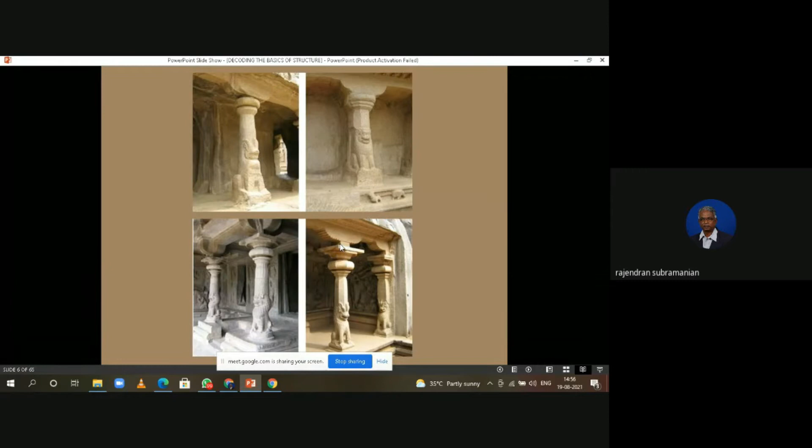Okay. See, this is another column in the front, how they have cut it and scooped out. See the cave-like thing. It goes on like that. And mostly this is not done for residential areas in India, especially in this part of India, that is Tamil Nadu. They have mostly used it for temples and other things. How many of you have visited Tirupparankundram Murugan temple? It is totally a carved temple. From the road it goes inside. So like that we have a few temples carved. And these motifs represent the type of architecture it is.

See, this is Mahabalipuram. Here also, the rock must have been at this top level, full, or here it would have gone like this, curved. And they have marked the plan from the top, and they know what depth it has to go. The depth also they've calculated, and they have started carving from the top. You have to come in reverse. So this is a very tough thing. Some artists, even pencil sketching artists, don't start from the beginning, an eye or a head. They'll start somewhere at a part of the body and then end up with that. So this is pure talent, and they had so many skilled persons.

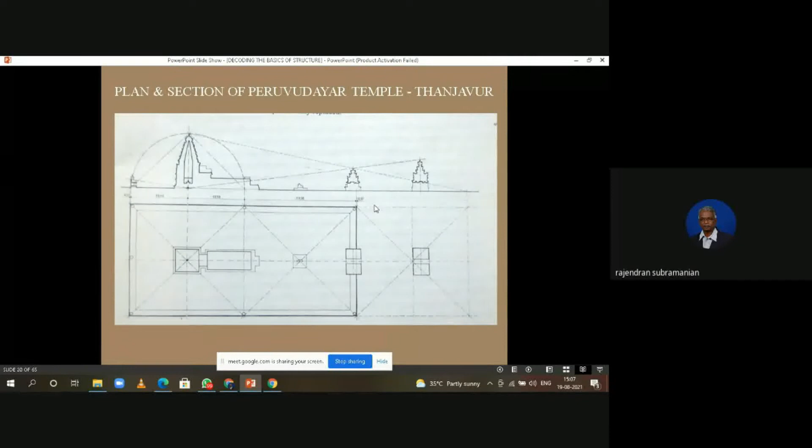See, coming to the subject, as we said, the load. Whenever a structure is resting on the top of the earth, it is pulled towards the core of the earth. That is gravitational pull. And now the structures are very tall. In the 10th century, the 60-meter tall Peruvudayar temple was the second tallest at that time. So we had the credit of constructing the second tallest structure 1,000 years back.

And I just remind you, the total load is transferred fully. And it is transferred in a foundation, something like a raft. The raft is going to be the whole plan of the temple. That is what we call a raft. And the raft is what we do in RCC. Reinforced concrete is used, and the depth will be about 1 meter or 1.5 meter or 2 meter. And this whole thing floats.

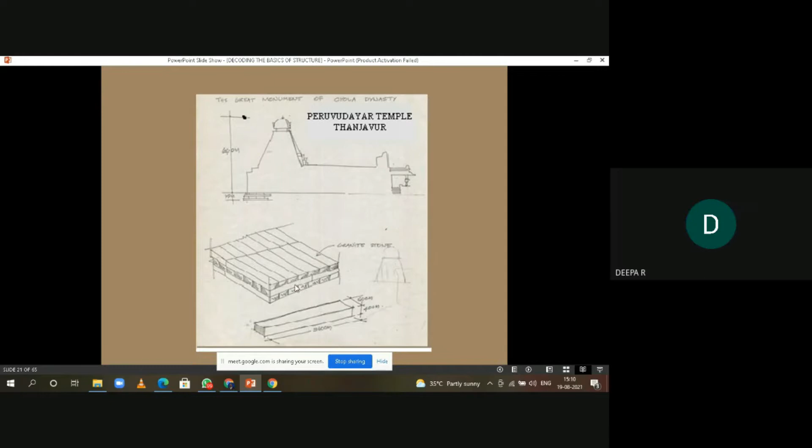Yes, sir. See, this is the foundation, we call it raft. You know, what is a raft? It is equipment used in water to carry heavy weights, so that it floats. A lot of wood logs are tied, and over that you keep the heavy weight. So we call it a raft. Another name for raft is barge. So now the raft. This raft technique was used about 1,000 years back.

The raft's main function is to distribute the load evenly throughout. When a load comes down and is transferred over a wider area, it distributes, and the earth is able to resist the load. That is the concept of it. So in the raft they had used stones, to a length of about 3 meters, 2.4 meters, or 45 by 45 centimeters by 60 centimeters. This type of stones were used. So the foundation's function is to distribute the load. That is why foundations are wide at the bottom.

Another example I can tell you: take a crowbar of 15 kilos, and take a rammer of 15 kilos. The rammer bottom will be about 20 centimeters by 25 centimeters. The crowbar has a very sharp edge. You drop them from an equal height. What happens? The crowbar penetrates more. Why does it penetrate more? The point load. The point takes all the load.

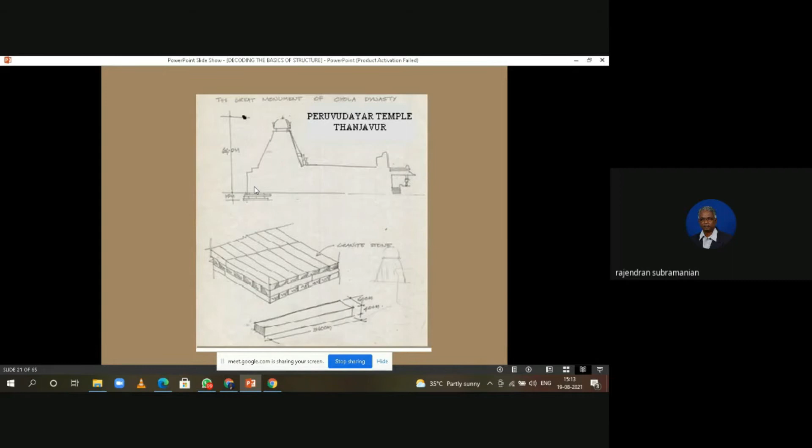Everywhere, in whichever country, they started using a vertical element that supports a horizontal element. The total load is distributed by that horizontal element, and half the load of this horizontal element comes to this column, this post, and half goes to here. So that is how it distributes.

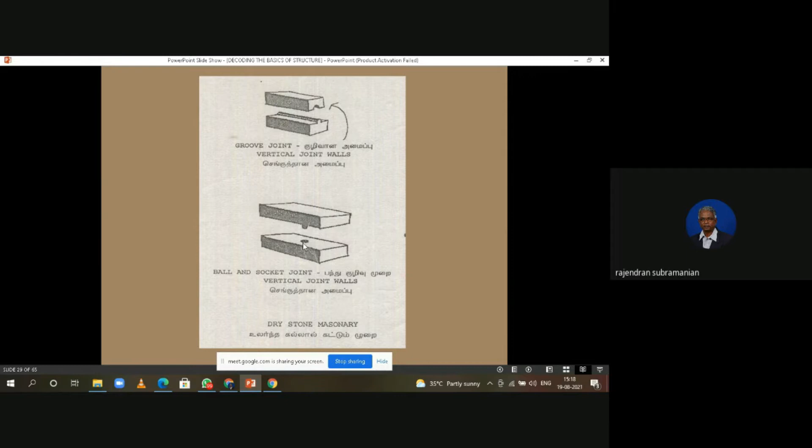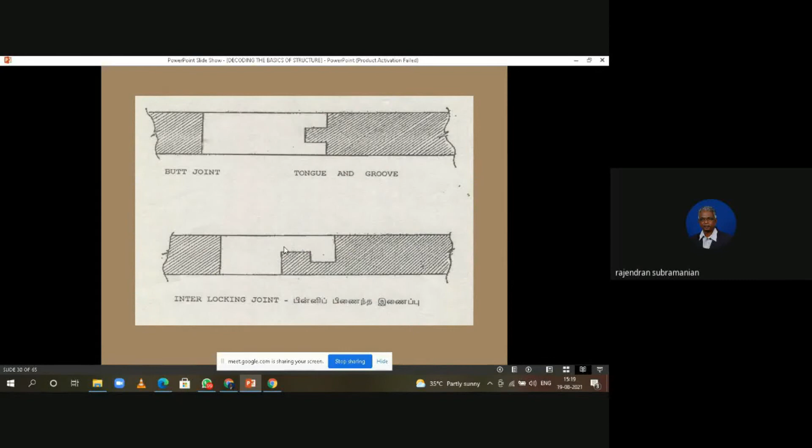See, this is tongue and groove. And ball and socket. This is a ball and this is a socket. This is to reduce the lateral movement. Another tongue and groove, straight line. And this is an interlocking system. All this was done in stone.

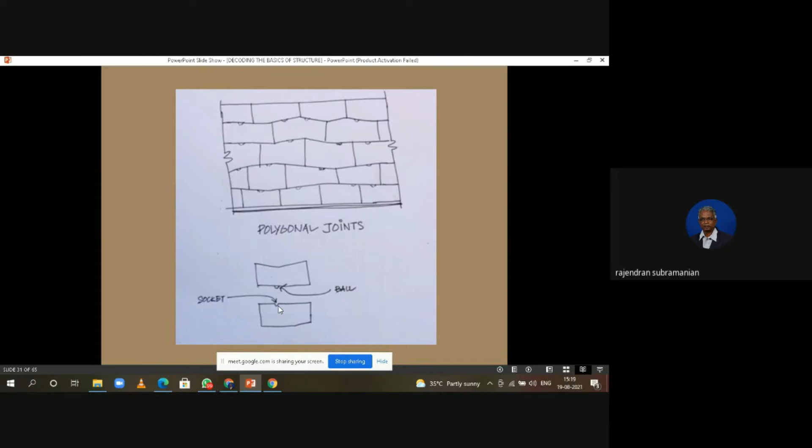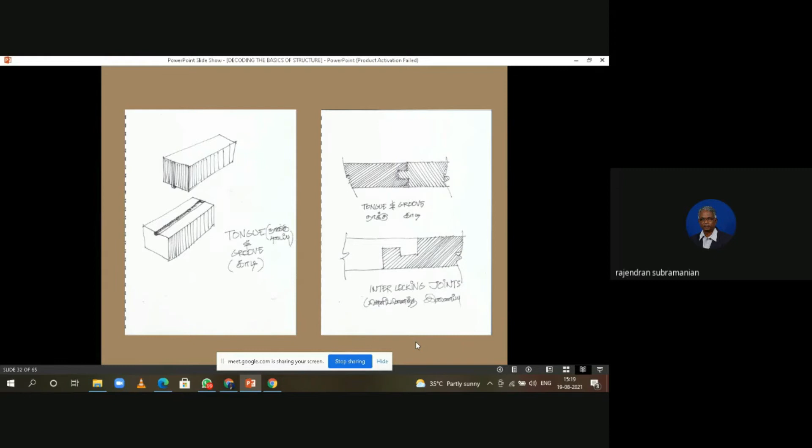See, this is another. You would have seen the big temple wall. The lines are not straight. The joints are not straight. That we call polygonal joint. And there is no mortar. This itself gives lateral resistance. Nothing can dislodge this. This wall, this is a ball and socket. The walls are done like this. Again, tongue and groove, interlocking. See another wall. This is how they've done it.

From here only the Westerners have taken the clue. What is this? Lego blocks. It is nothing but, instead of ball and socket, ring and lock. It will have a cylindrical projection and the top will be hollow, and it will be tightly fixed.

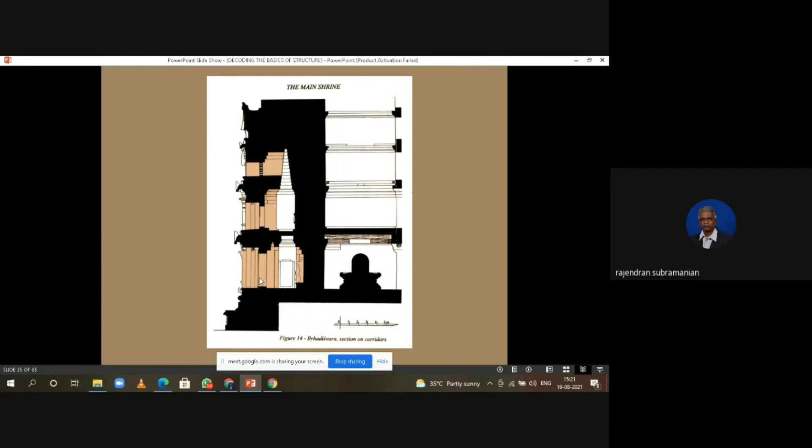See the beautiful cross section of this. And you can see the detailing, the side compound, what I said: one wall is 13 feet and another wall is 11 feet and the inside corridor is 6 feet. See, there are 2 layers, 2 tiers, and over that is a hollow structure. But see, at the top, it goes up to the top, hollowness, just below this.

And see how the load is; it's solid. It's only done something like a corbelling only inside. And the load is transferred on this and brought to the 2 walls. And from the walls, it goes to the ground, raft foundation. The front mandapam, where you could see a lot of pillars, and then the roof.

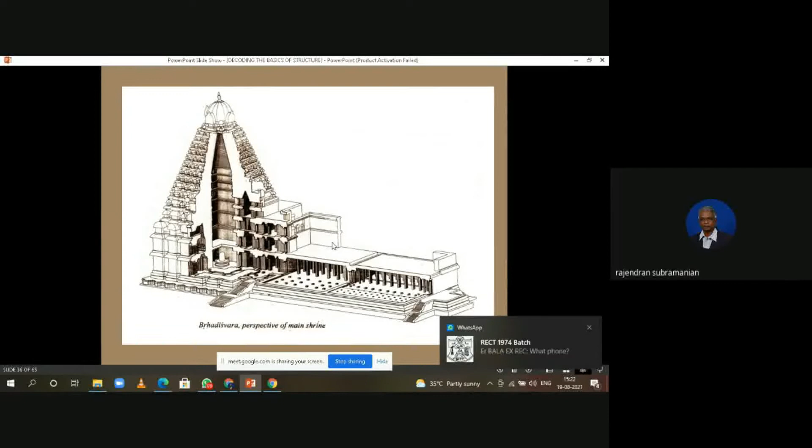See the inside corbelling. It goes up. It goes up. And this is what I said. It's a polygonal joint. It's not a straight line. Randomly it goes.

Look at this. Another technology. Technological wonder. See, from here, from the support, from the column, it will be about 2.1 meters and more. And the whole thing stands. This is not wood. It's all stone, carved something like woodwork. And this is a support. This is a cantilevered support. This is a fulcrum, a beam.

Over this beam, this sunshade is placed. And the way the sunshade is fixed, we'll see the details. See, this is how. Bottom pillar, from there the beam. This beam is anchored to the ground, the other backside column. And over that, there's a beam fulcrum. And on that it rests. And again, this goes up.

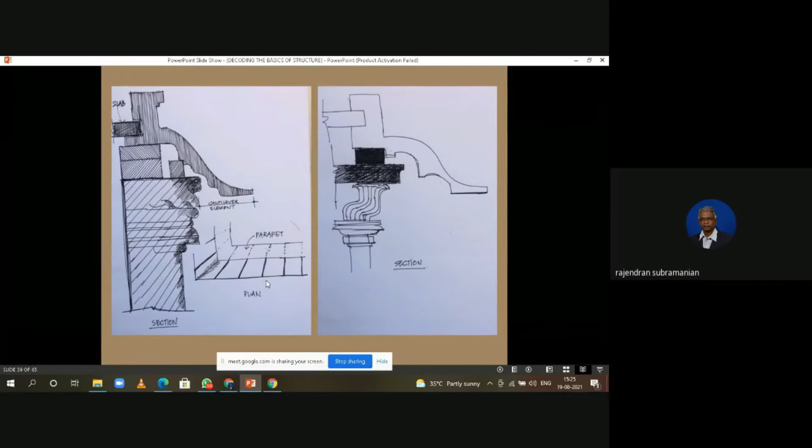The whole thing stands. It was done 1,000 years back without any technical machines or anything. See, they had the mind, they had the wisdom for load distributions and other things. Look at the cornerstone. One is at 45 degrees. This is directly to the east towards north. And this is 45 degrees.

Look at this, how it is. This is one unit. And this is another unit. This is another unit. That is how it is assembled. It is something like woodwork, but it is not woodwork. See the joints, 1,000 years it has been standing without any mortar, like this. See this. This is a separate unit. This is a separate unit. Look at this.

Now coming back. As I said, posts and beams. How many of you have seen this? In Tamil, it is called Sumaidangi. Sumaidangi means a load bearer stone. Sumaidangi kal. See, this will be at the junction of a highway where a village road branches off.

So when they come in a bus or in a vehicle with a head load, they take the head load, place it, take some rest, then take it from here and walk to their village. From the village, when they come to the town, they'll bring the head load, place it and then take it. This is the best example of posts and beams.

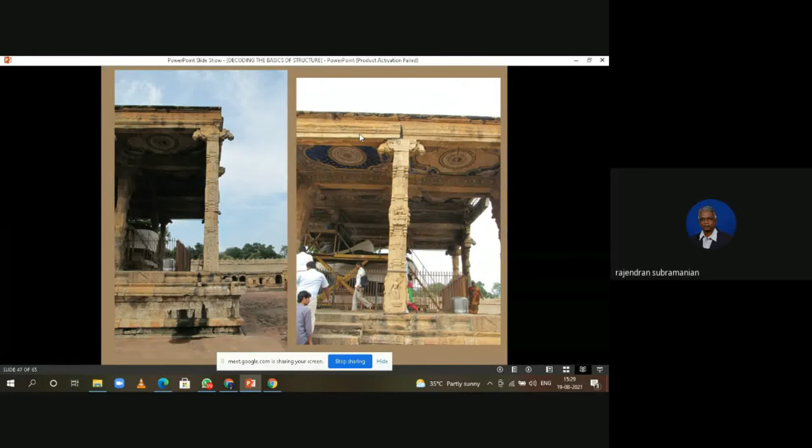See, this is another column. See these decorative motifs to bring the projection like a cantilever. At the same time, they conceal it with the decoration. It is a cantilever. Still further it goes. So that's how they reduce the span and introduce a beam. The same technology we are adopting now.

We are doing a lot of temples with machine-made stones. See, like this. See, this is a bed block at the bottom. Over that, a stone pillar. And over that, another bed block at the top to take the load of the beams. And over the beams, we have either a vaulted roof or a plain granite slab roofing.

This is how the modern temples are done with the traditional methods, the principles our forefathers had adopted. Now we are doing it with the modern materials, with the modern machineries and tools. We are adopting the old system.

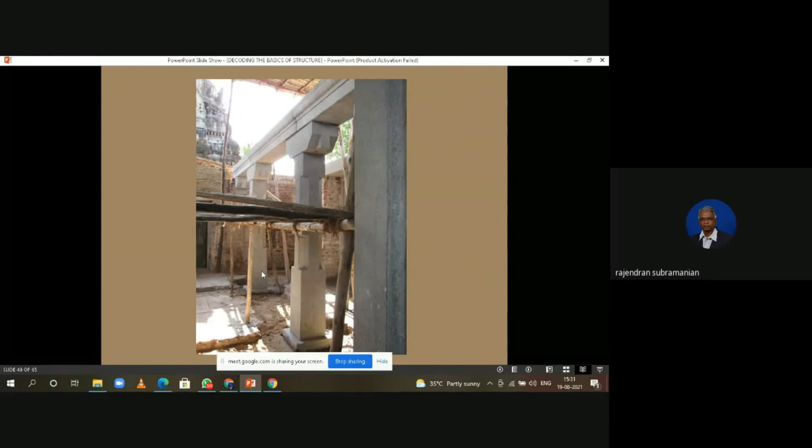The same has been adopted by a European firm by the name Teamage. That is in India. Chennai Silks is doing that Teamage work. Here you can see the columns. See, you can see the column rods in the floor. Up to the ground floor, regular construction is done. And over that, the dowel rods are left. And then the columns are cast at different places with holes, 6 holes on that.

And it is inserted on the rod. And the 3M paste, a chemical, a glue, is epoxy, not acrylic, epoxy. Epoxy glue is inserted, and this stands. And over that they go for a beam. This is something like a stonework done by Rajarajan, but now it is done in a modern way, with modern materials, and they do the work very fast.

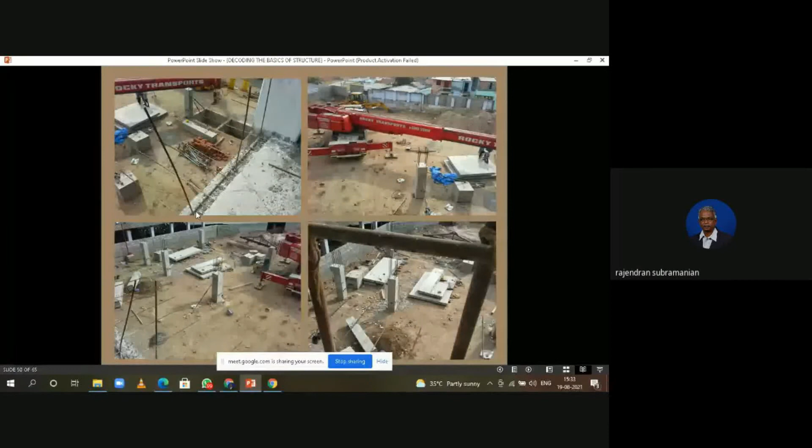The material is cast at different places. They bring the elements by truck and fix them in place. This is using modern technology, doing the traditional work. Very beautifully adopted. So what I say, Rajarajan has done 1,000 years back what we are doing now.

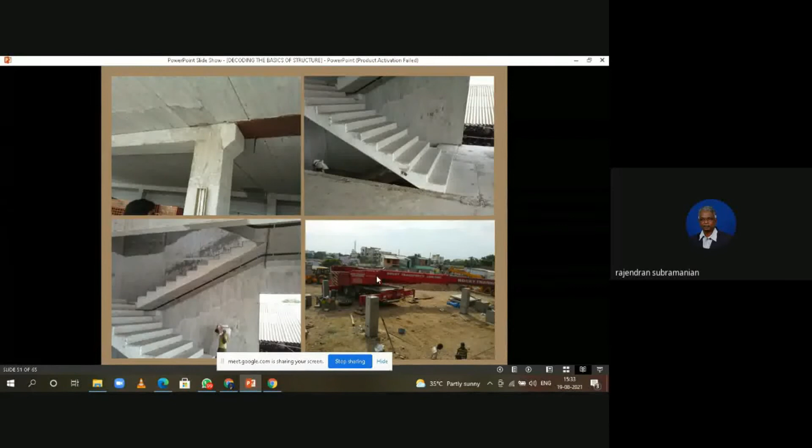Look at this, even the staircase is cast separately. The beams are cast separately. You'll see how the beams are fixed. Staircase. See the column, see the beams, and over that slabs. The precast element. See, I said the dowel rods, over the dowel rods, they place the column and grout it with the epoxy-based glue. Through these holes, under high pressure, they apply the glue, and the column stands upright.

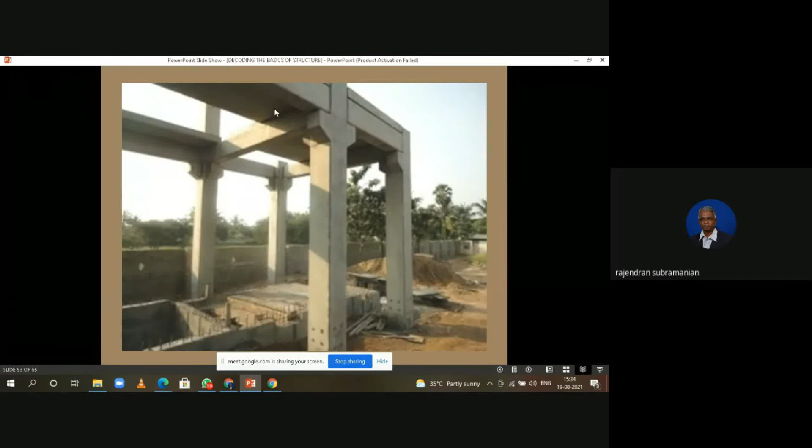And in this, they place this beam. And over the beam, they put the slabs. Look at this. This is a column. This is a beam, independently. See, look at this. The technique we call it precast. But what Rajarajan has done in stone, they are doing it now with the precast technique. It's nothing. Only the material shift is there.

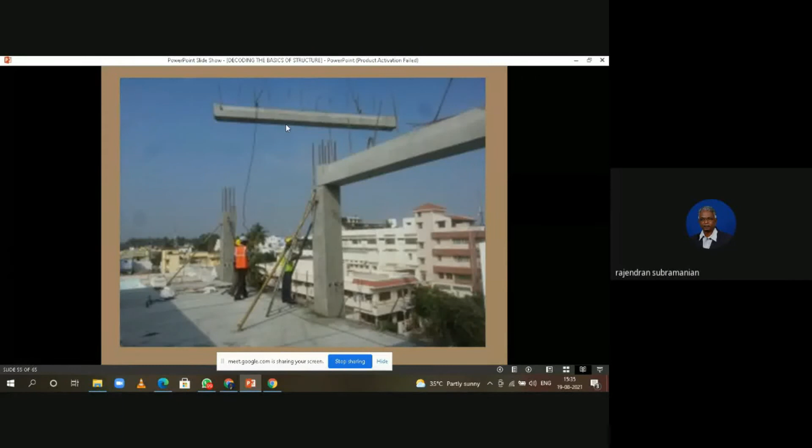Instead of stone, we have amalgamated stone chips, sand and cement. We make a compound. We pour it over a reinforcement and make a beam. But originally it was just stone. The depth was more for the span. But at that time we never had the equipment to lift, so they introduced a column in between, and they took a stone of this size and placed it. Now we have crane facilities, so we can bring the precast element from somewhere and place it here.

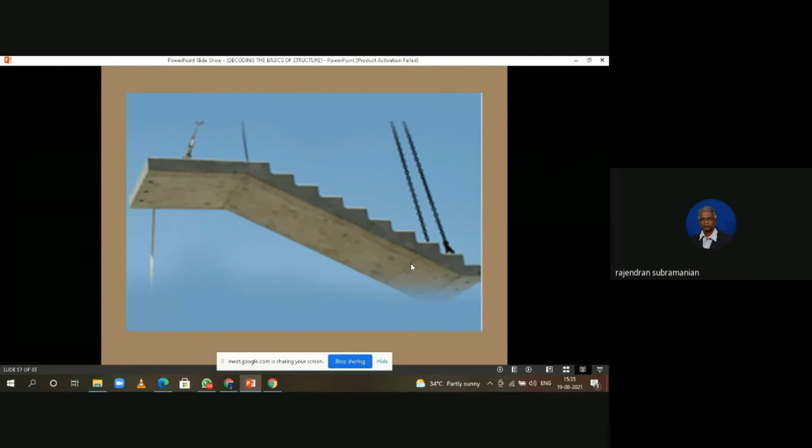See, look at the structure. See the holes here where the dowel rods will be fixed after fixing. Normally you students won't be able to understand the area, but to just take it, it will be about 1,50,000 square feet area, the plinth area, with the 6 floors. They'll complete it in 3 months.

So fast. A 1,000 square foot house normally takes 1 year. 1,000 square foot. Look at this. Then imagine the time span and speed, what type of materials used because of the precasting technique.

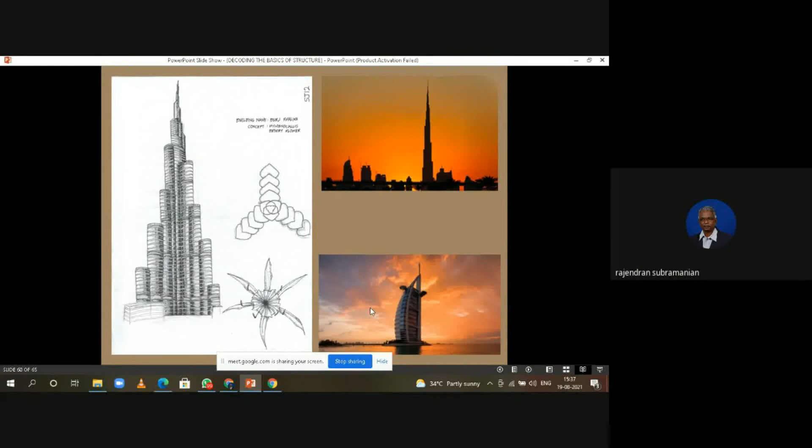See, now I've started with the traditional compression members. Now gradually shifting to tensile members. The tension members, if you maintain the equilibrium, you can do it. See, like this, the twist. This is also a structural part. Pre-tensioning. The best example is for that pre-tensioning.

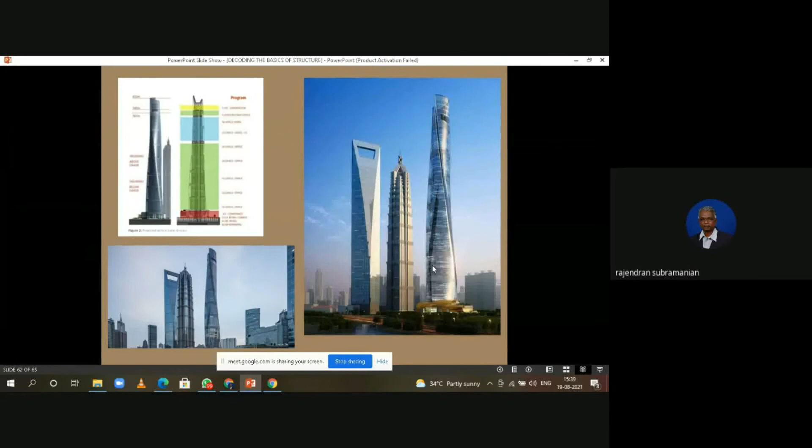How many of you have the rope made out of coconut fiber? When it is single fiber, it's very fragile. When you twist it with 10 or 15 fibers, you get a thread very strong. Still, if you add on the strands, it becomes very strong. That is how they make that huge ropes to pull the temple car. Ter vadam, they call it. That is also a technological thing. Again, twisting, pre-stressing. All those things are there.

and based on the rotation done with machines. See, here the cantilever arm is so big. The other side, it will have a balance. The center core takes the load of both.

Now I think I have taken you around and shown you the transfer of compression members to tensile members. Initially, all the temple constructions, about 1,000 years old or 500 years old, were of compressive members only. Now, these modern structures have a lot of tensile members, all because of the materials available.

Advanced steel is available. Even the concrete is used with a different combination to increase the strength. Tensile stress, compressive stress, all those things. So the development is there, but at the same time, the traditional wisdom still lives, and it is able to cope up with the modern technology, the advancement. So that's what we say. The basic principles are same. Only the materials adopted are different.

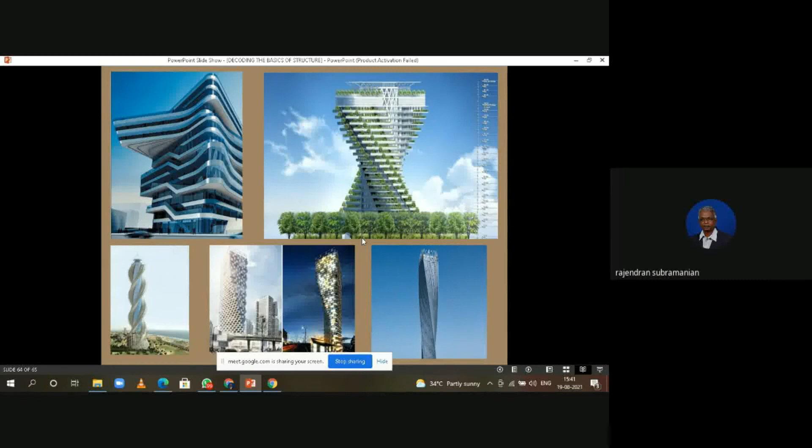Okay, with this, I wanted to conclude with this structure, which has got all the technologies adopted in the modern buildings.